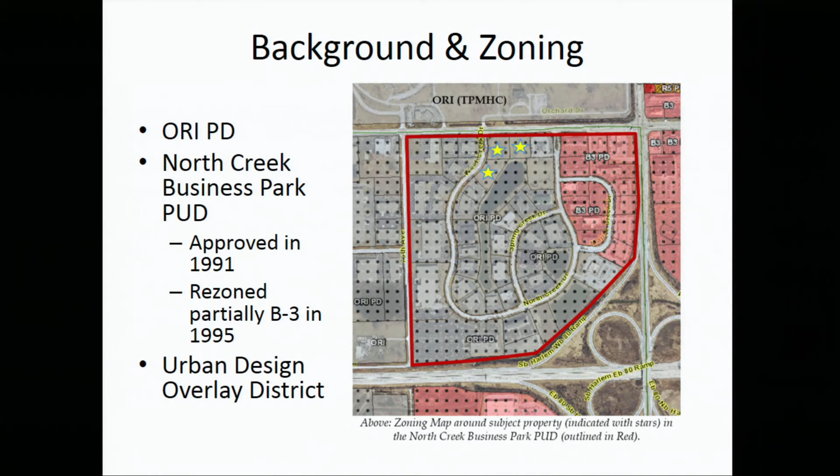It's also located in the Urban Design Overlay District, which promotes walkability, urban design, pushing parking to the back, things like that. In this case, it'll come up because they have some exceptions to that Urban Design Overlay District. We try to meet that intent as much as possible, but to some degree, the surrounding development that's occurred out there, as well as the use itself, which is an auto-oriented use, makes meeting those standards difficult when you have something that's intended for auto use to make it walkable. But we have done some things there to meet the intent.

Also out here on that hard corner, the southwest corner of 183rd and Harlem, is the Speedway that's out there, so the other gas station in the area.

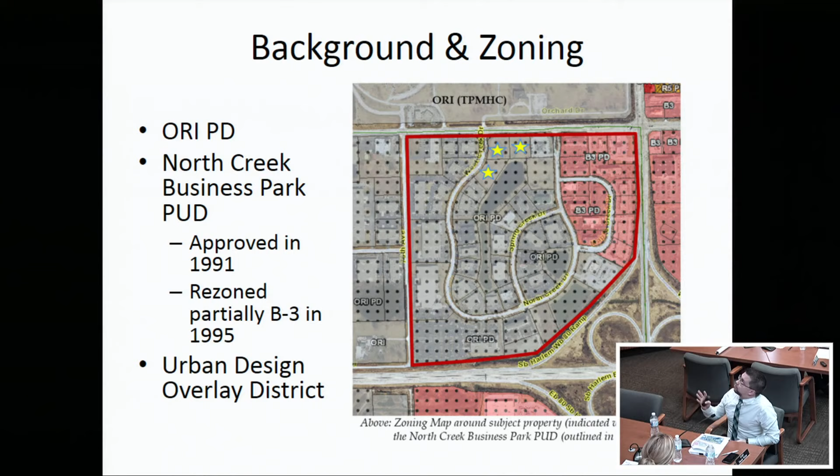This will be 2 parcels and then take a sliver of a 3rd parcel, so those are the 3 shown on your screen with stars out there. And the reason why this site was picked, I think one of their strongest points is it's in Will County, and for competition purposes, if they were gonna be on one of the other corners, it would be difficult to compete with Speedway. So this is kind of that last spot out here that I think the gas station could really work.

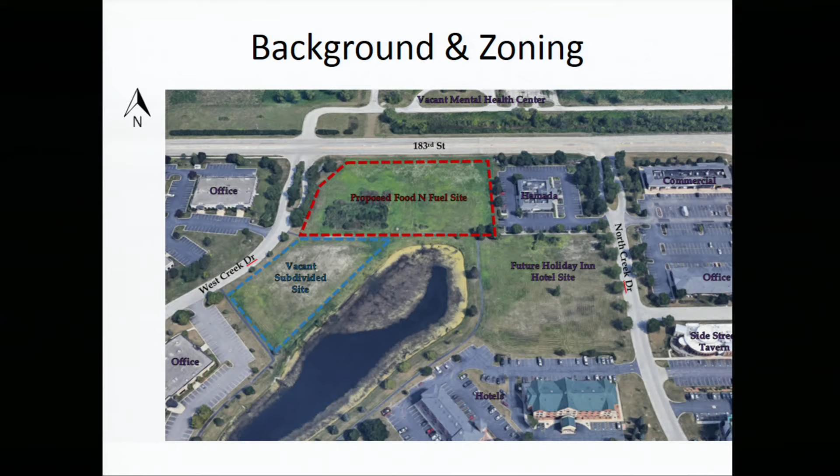Here's the location of the site, with a vacant parcel to the south. To the west is light industrial, office type buildings, flex space buildings. To the east is Hamada, and to the southeast is the Holiday Inn site that came before you a month or two ago and recently got approval from the village board for a full-service Holiday Inn on that parcel. To the west of that is Buffalo Wild Wings and Pops, then Wendy's and the Speedway site.

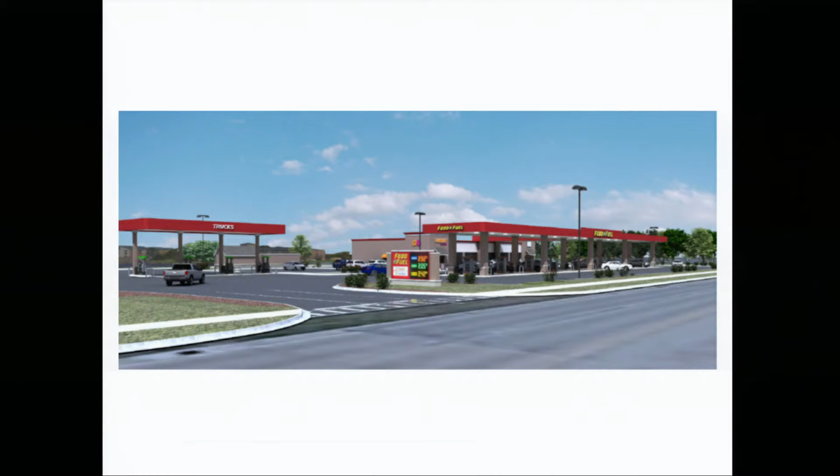So here's what the site will look like in the end: a gas station with truck lanes, as well as a 9,100 square foot convenience store with a drive-through Dunkin' Donuts and a second food vendor, yet to be determined. Also typical retail items and a gaming area are intended.

This is on a 3-acre lot. There's 18 vehicle fueling stations outside, and 3 truck fueling stations - that's a correction from what I said before about 4. Because of the way trucks fuel, they need pumps on both sides, and usually tanks on both sides, so it looks like 4 if it was traditional vehicles, but there'll be 3 truck fueling stations.

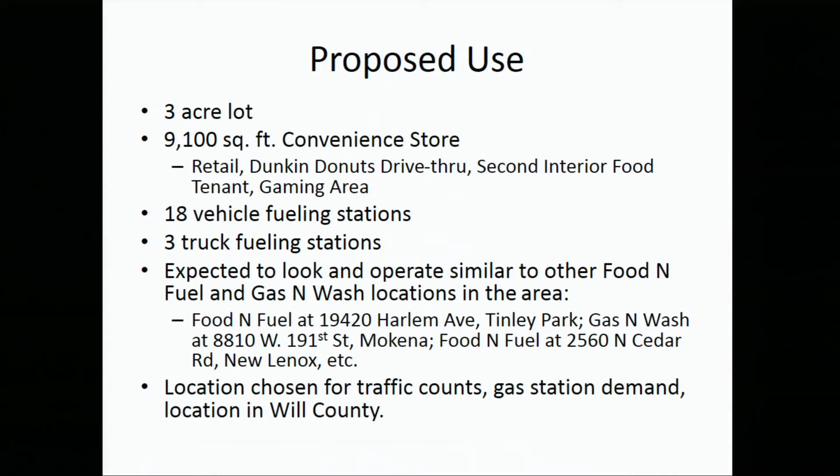This is similar to a Food N Fuel with a car wash that was added afterward on Harlem, which was before you for annexation and was recently annexed. There's also one at 191st in Mokena that's a Gas N Wash very similar to this, and another one on Cedar Road in New Lenox. They've been popping up all over, so this is right in line with what you see at those locations.

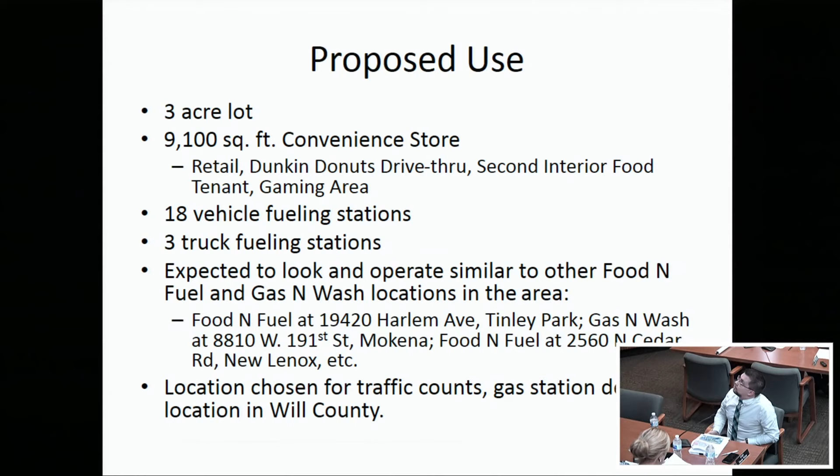Here's the floor plan layout, kind of hard to see, but there's a retail area, service counter, a couple food service areas, and tables will be in there.

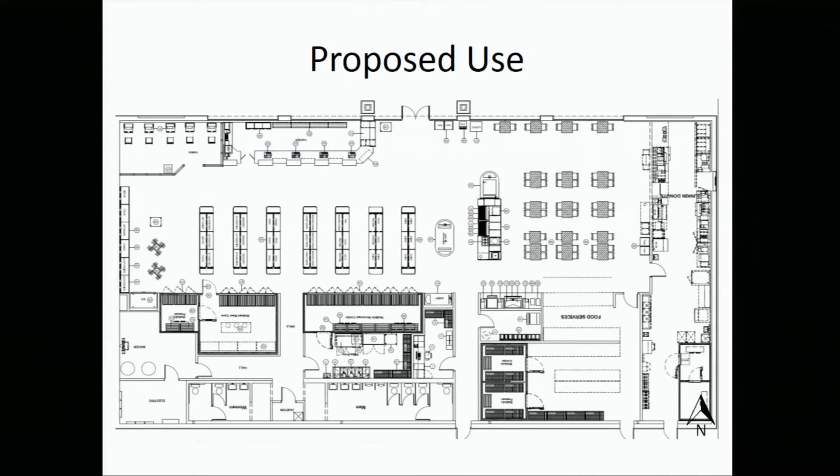For the site plan layout, the fueling stations for trucks are on the east of the site, the main vehicle fueling stations are to the north, and the convenience store is to the south in the center of the site, with the Dunkin' Donuts drive-through wrapping around the back and then to the east.

They have sidewalks, a public sidewalk that will run around the site. Sidewalk connections are kind of limited in this area, but this will tie their sidewalks to the west, and we're trying to get them at least on 183rd. We've talked about it with Holiday Inn too - it's kind of a shame this area doesn't have sidewalks since there are hotels and restaurants, it's a little more touristy, and even the office tenants need to be able to walk through there.

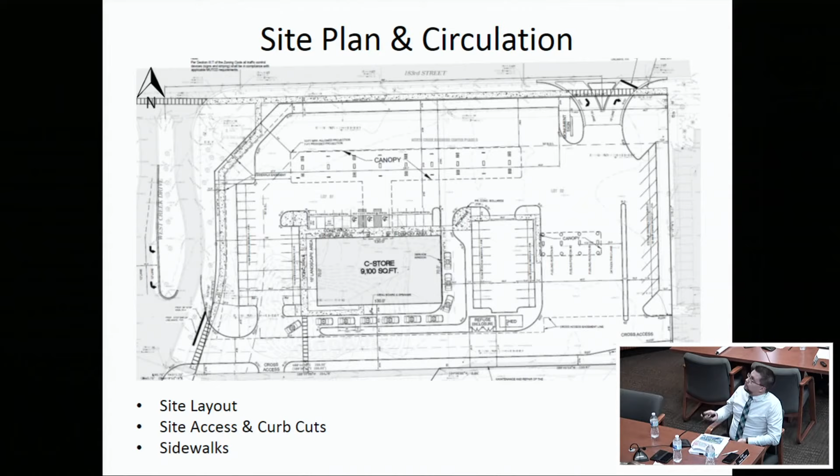Again, there's the overall layout of the site with the parking and the gas station.

Parking-wise, this is a fairly unique use, so it's hard to apply our traditional zoning code to this because it's not something we typically have. You have gas stations, but they usually don't have full food service inside. This runs a little more popular than what you typically see. We tried to break it down based on the uses within this to give some guidance on what parking might be needed. Our zoning code, even by itself, sometimes isn't the best even when it does align - sometimes it overestimates the parking needed, sometimes it underestimates.

So we rely a bit more on them to give us a parking study, which they did, and they updated it - it was in your packet this time - from KLOA, their traffic consultant. They have other sites like this, which I think is a better representation of what kind of parking we're going to see here, since we have known sites out there that function like this. We wanted hard data on those, and they added that into the report as well.

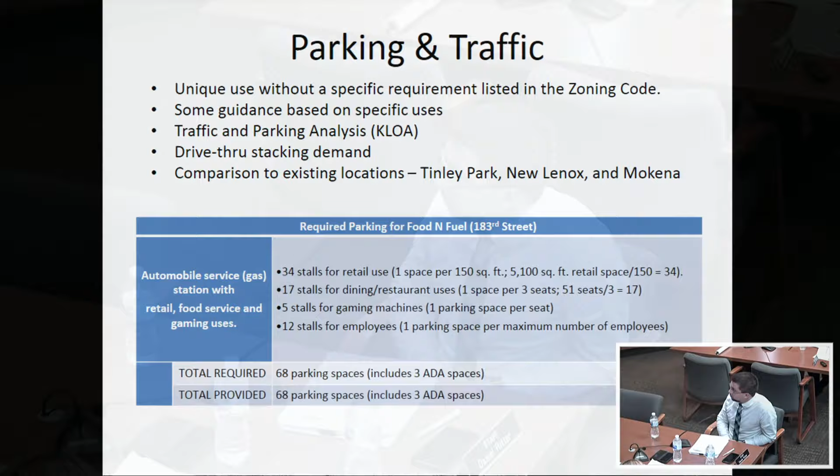When we break out those counts, you have people that do multiple things — they'll go get gas, then go get food, using both uses at once. So I think you get some spillover there. On the drive-through side, we had them add a little more counts in terms of the other sites they had. There's a Dunkin' Donuts at almost every gas and wash, Food N Fuel location, so we had them bring some hard data into that.

This site has 10 stacking lanes. Most codes require 5, 6, or 7, but Dunkin' Donuts is getting a little more popular and expanding their menu, so we want to make sure we have sufficient stacking availability. The other sites they looked at had a maximum usual amount of 8, so here they'll have 10, and we think that'll be sufficient for the stacking. We're still going to look into, maybe with the permit, exactly where the menu board is going to be, because that could change things — one more stacking spot for people waiting for coffee, or one more ordering spot — but we'll look at that when the permit comes in.

On the landscaping side, there were a couple waivers we talked about at the workshop. The biggest one is the north buffer yard, which is fairly unique because typically they'd have to put in parkway trees as well as trees in their buffer yard, and it doesn't discount trees in the parkway. So there'd be twice as many trees out here, and if they met that, it would block almost all visibility to the gas station. We want a good landscape site, but our landscape code can be a little over-ambitious depending on the situation and location. I think that's what happened here, but they did meet it as close as they could.

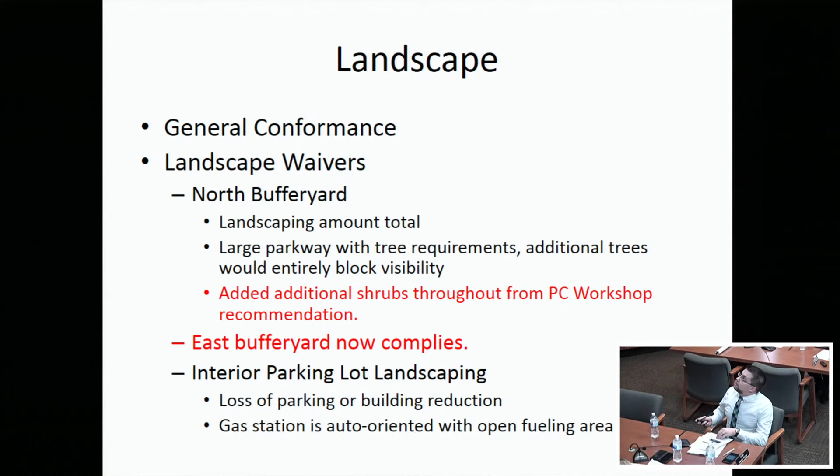The last waiver they had for landscaping was the interior parking lot landscaping, which no one really brought up concerns about at the workshop, but it's hard to meet on a gas station site where the entire fueling area is counted as a parking lot, so it's hard to install landscaping into a fueling area. If you discount that, it comes a lot closer to meeting the landscape code. So there's the plan that they had.

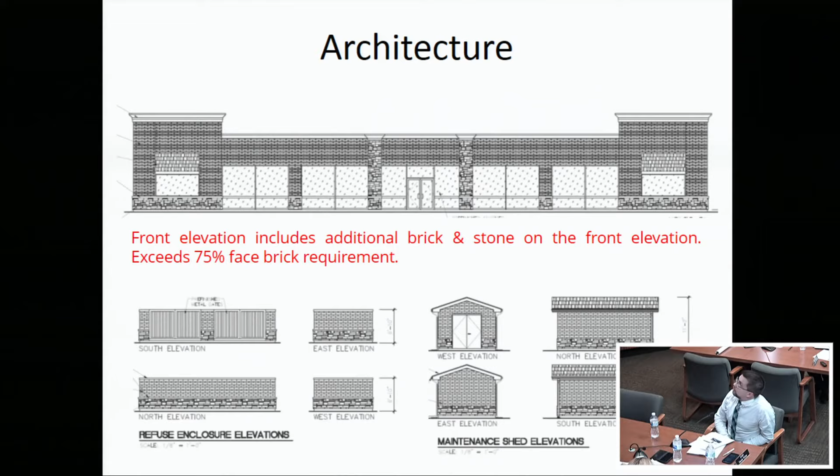Architecturally, this is one of the biggest changes they've made from the workshop meeting. We caught, or Paula caught, during the meeting that they were a little short on the brick or masonry percentage. The front had some EIFS area but no real signage there, so they converted it to brick, and brought up stone on the pillars in front to break up the brick. Those were two suggestions we gave them, along with using a lighter brick on part of it, and they've incorporated both into the plan.

So now it exceeds that 75% face brick percentage. They also have matching enclosures and a maintenance shed on site that meet that same brick and stone base, which I think looks pretty good for a gas station building.

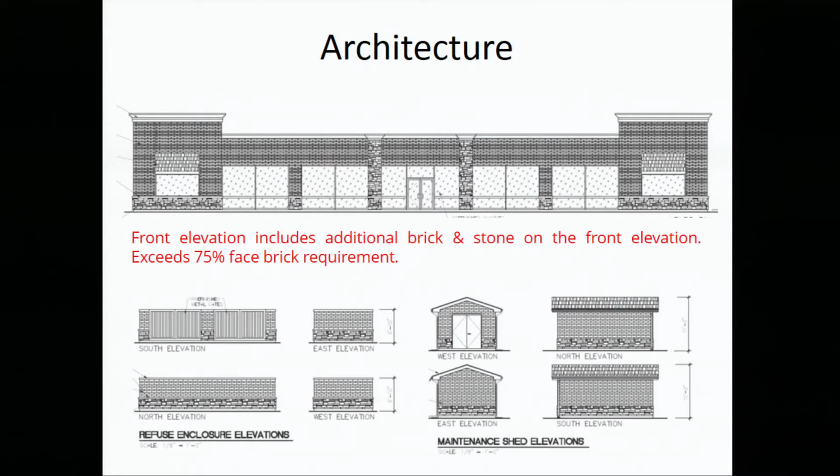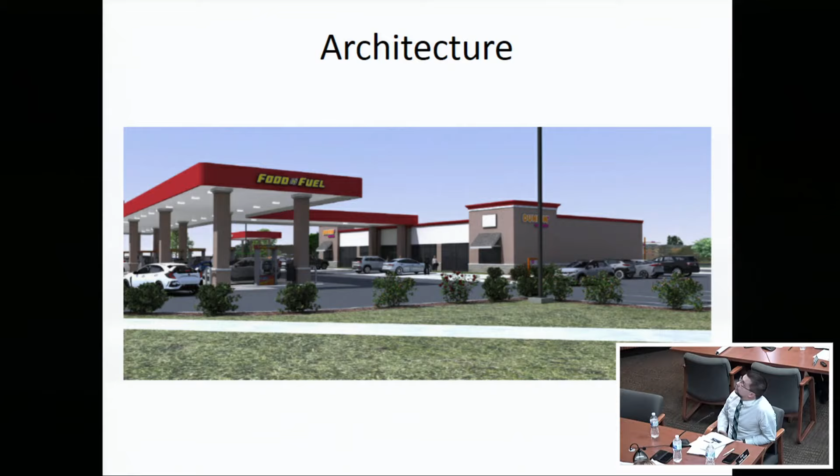We also have updated renderings for the site. The only thing not updated on these is the brick, so you can see the lighter white area in there—that's now brick, and they're going to do a lighter toned brick than the rest of the building. Everything else has been updated on these renderings.

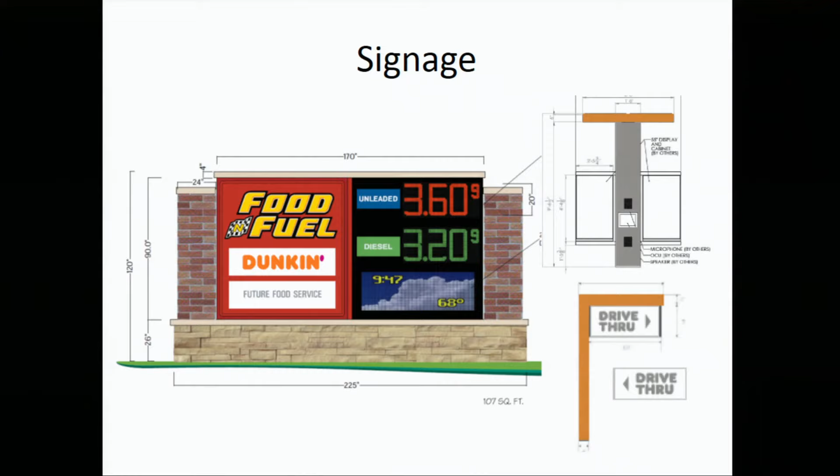Signage-wise, they meet our sign code for the canopy signage and wall signage. They have some. The ground sign has an LED message center display, and it's the right size in terms of percentage of the overall sign. They also have signage for their Food N Fuel and two other tenants, plus some directional signage placed at decision points on the site plan that make sense. We like limiting directional signs to areas where they work best, and I think they've done that.

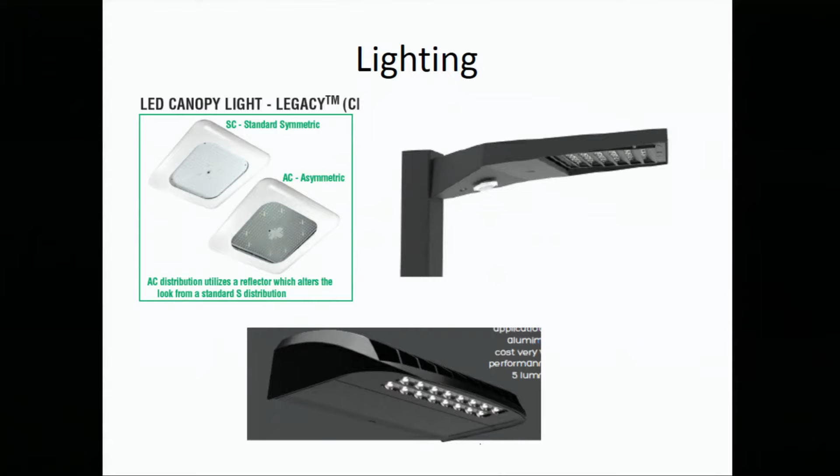On the lighting side, we have a new lighting ordinance in effect that you guys approved about three months ago. It requires everything to be downcast and full cutoff so there's no glare out in the roadway. They've accomplished that here with the lights they've chosen, and they've also gotten the foot candles right so there's not a lot of light spillage off the site. There's no residential around this, but we still don't want light or glare spilling into the street or onto other sites.

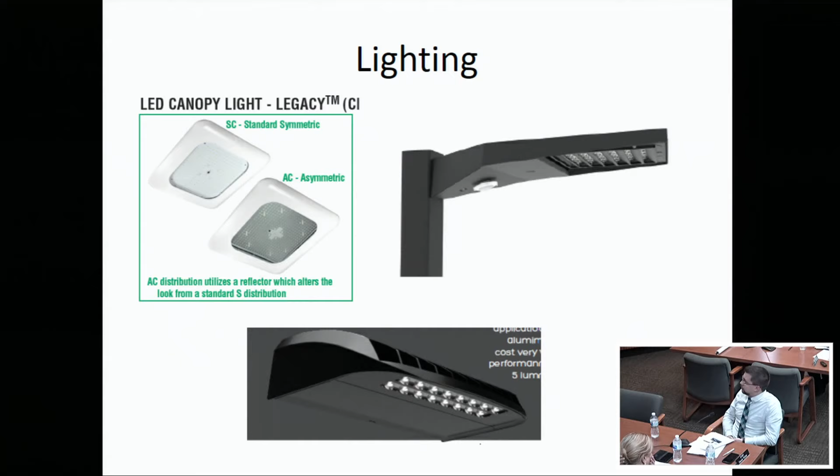For their approvals, they have a site plan, but there's also a need to add a gas station, or as our code calls it, an automobile service station—a bit of a throwback in the definition—as a permitted use in this PUD. Right now it's not allowed in the list of extra uses typical of B3, and it's not allowed in the underlying ORI. So we thought about possibly rezoning it as B3 underlying zoning, since it's directly next to B3 zoning, or with Hamada's which is technically ORI too and is a restaurant. It made sense to possibly continue that B3 zoning down, but we thought the simplest route was just to add this as a permitted use on this site only.

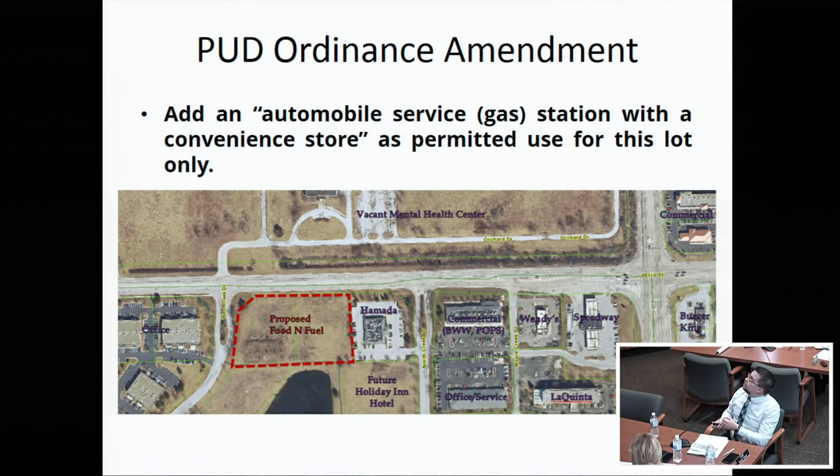There are a couple other vacant sites left in there; they wouldn't be allowed to do a gas station. This also benefits it because a special use usually doesn't transfer to new owners, so someone might need to come back if this was sold to a different gas station. Making it a permitted use means it can be transferred in the future since it's being built out as a gas station. So that request is amending the original PUD ordinance to allow this.

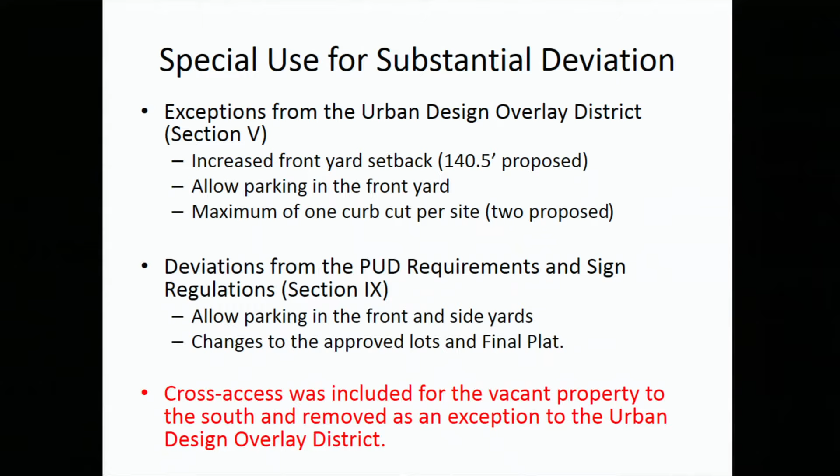Separate from that, there's a special use they're asking for. The majority of that involves exceptions from the urban overlay district, as well as a couple from the PUD regulations. Parking in the front yard typically isn't permitted in both the urban overlay and the PUD, because they wanted more of an urban feel. But with a gas station, it's hard to make that happen unless you push the whole canopy to the back, and then they don't quite get the access and feel they want to draw people into the gas station.

Cross-access, so they eliminated one of the exceptions, because cross-access was included to the vacant property that's to the south of this. So there's one more vacant property that connects to this, and they included cross-access. Whether that makes sense or not, we can determine when that property comes in. If it's an office building, they may not want that traffic.

And then there's cross-access to the east as well, to the Hamada site, that's already built into the Hamada site, and then it'll be here. If you go back to the site plan, trucks won't go out to the east on this. They won't go to the east into the Hamada site. There'll be no truck access on both Hamada's property and on this site.

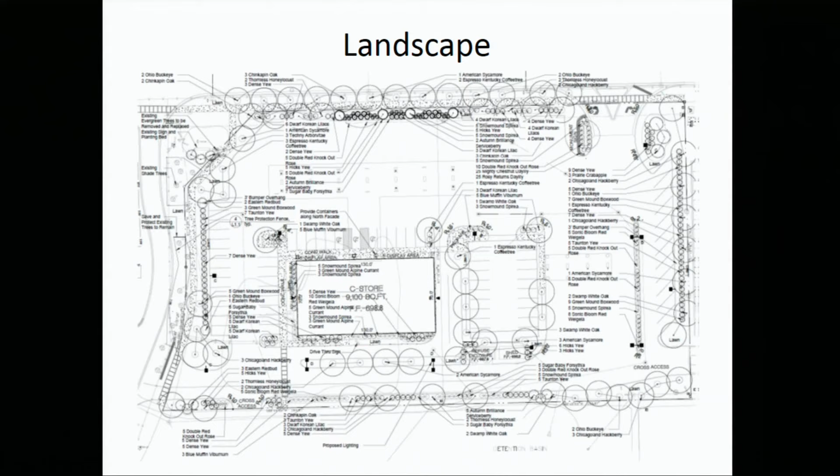So trucks will mainly go to West Creek Drive, but if you're just a passenger vehicle, you'd be able to go on North Creek Drive where Hamada's at, and then drive through. There's a drive aisle through there that would connect to this property. The cross-access always helps avoid the number of curb cuts that we have on our streets.

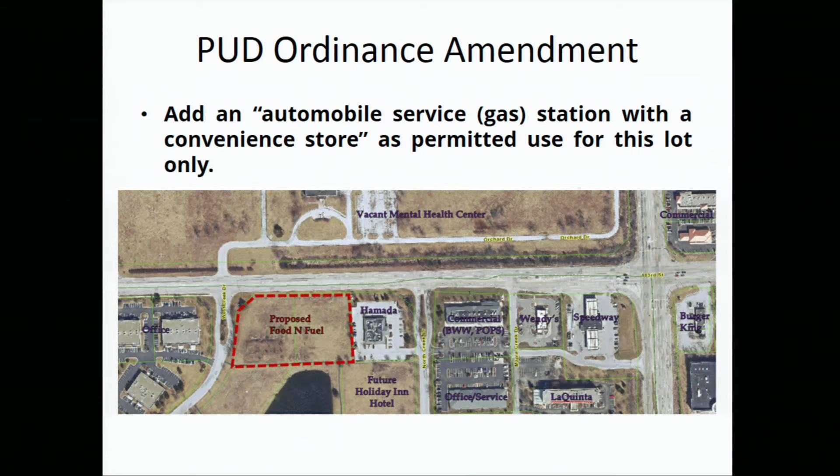Then lastly, I think I forgot the plat on here again, like I did last time, but there's the final plat of subdivision on your property. That is consolidating the two lots that are there along 183rd Street, and then it is also taking a very small sliver, just over 100 square feet, from the vacant property to the south. That's gonna make this 3 acres. That's a requirement to get gaming at the state, and they obviously wanna have that ability to get it. So they're taking a small sliver from that and consolidating the other two parcels.

On top of that, the plat carries over all the existing utility easements. It adds the cross-access easements to the west and the south. And then it also adds a sidewalk easement. Some of the public sidewalk will go onto their private property, so there's a sidewalk easement for that as well.

Besides that, I think they've taken care of the open items that we talked about. The last thing, and the thing that I think was discussed most at the workshop meeting, was the possibility of a light somewhere out here, either on West Creek or North Creek Drive. West Creek still is, talking to our engineer, that's where a light would be, on West Creek Drive.

We've talked with the county, and we've talked with the state about how this would connect with the Harlem light before. It really hasn't gone anywhere because there hasn't been the traffic counts or the stacking that is required on one of those streets to get it. Obviously this is gonna be somewhat of a draw.

We also have 2 hotels that were built since the last time we talked to them, so the engineer's gonna talk to Cook County again and try and get the ball rolling into seeing if they can look into it. A lot of times that takes a long time though, so he's also gonna bring this up in terms of, can we pay and do the study and see if it's there, or maybe do some kind of initial counts to see if it meets the standards that we need.

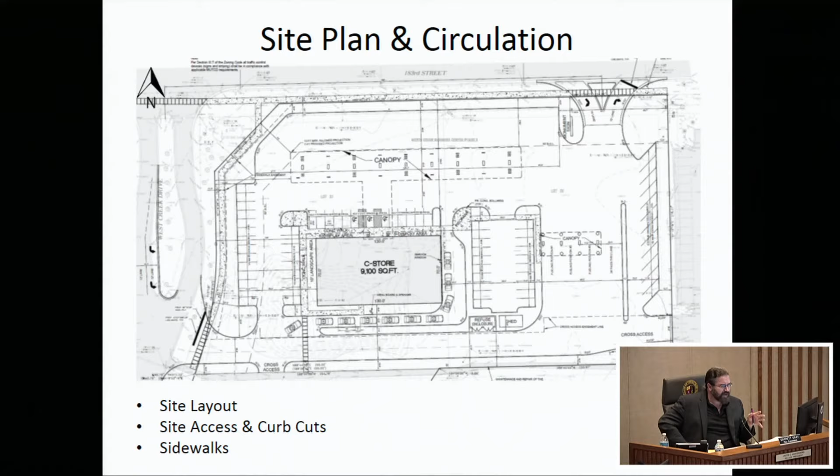Yeah, we did. Just so I understand you, you're talking at the right in, right out - yes, correct - and the proximity of the pumps and them turning around. Yeah.

This is a lot like your one on Cedar, 6 and Cedar, where you got the right in, right out, right where the pumps are.

Okay. And one thing we have going for us with the right in, right out - the majority of the traffic's gonna be coming in on the west drive. Typically most people come in that first drive instead of the right in, right out, so that will help us. Now that it's not a full access drive, it will help us too, because you won't have the queuing that you may have had if someone was going left. But I think it will function fine.

Okay, people know in a gas station there's a number of movements. You have the trucks coming out from the south there, but we're not expecting a whole lot of trucks. And the main thing is there's a lot of good sight lines - you can see as you're pulling around, and you'll be able to see everyone. And when you come around that corner from 183rd...

Those are pretty tight turns, so you have to make those about 5-10 miles an hour. So as you're coming around there, you'll be able to see if someone's coming around and pulling out. Okay, yeah. Great question, though.

And the reason being is, it is a madhouse at that speedway, and I figure this will get bang-up business just like them. It would probably take away some of the business, which is fine, because I think there's gonna be a lot more businesses that need gasoline, and you don't want to wait at the pump.

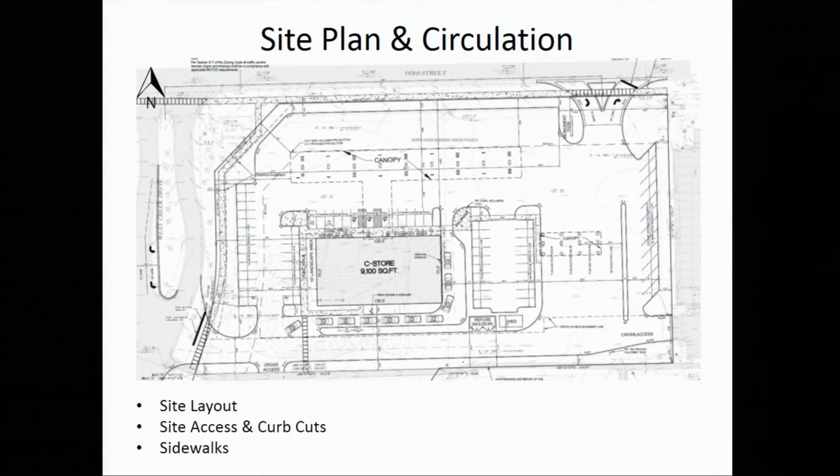I will say about the crosswalk, that is common that you find along any driveway, any road. It's usually right along the property line or the right-of-way line. Good drivers, most drivers, are aware that pedestrians are crossing the road. The one thing with the right in, right out, they will have a refuge area in between, so as they cross, they can stop and make sure. And once again, you can only make that turn so fast, and the sight lines are great too, so there's not a whole lot of trees in the way or anything like that.

So it's common, you see it all over the place. Once again, it's a concern, but I think most people understand it, and it should function fine. It's one reason why we like the raised medians there too, because sometimes they try and just stripe that out, and that can have people take the turns quicker. But there's not much else you can do if you want a sidewalk on 183rd or LaGrange, or even Harlem, if you want a sidewalk and you want to have commercial, at some point there's got to be a crosswalk.

But I think the raised median and then the islands in general here kind of help traffic flow, where Speedway is a terrible example, it's just open, undefined pavement throughout the site. So when you put in curbs and landscaping, it really helps slow people down, where at Speedway you can drive through the parking stalls, if they're parking stalls, or whatever else is out there. There's not really any kind of islands when you enter, and no curb delineation throughout it. So I think this will function much better than Speedway, just because of the flow they have set up here, where Speedway's just open.

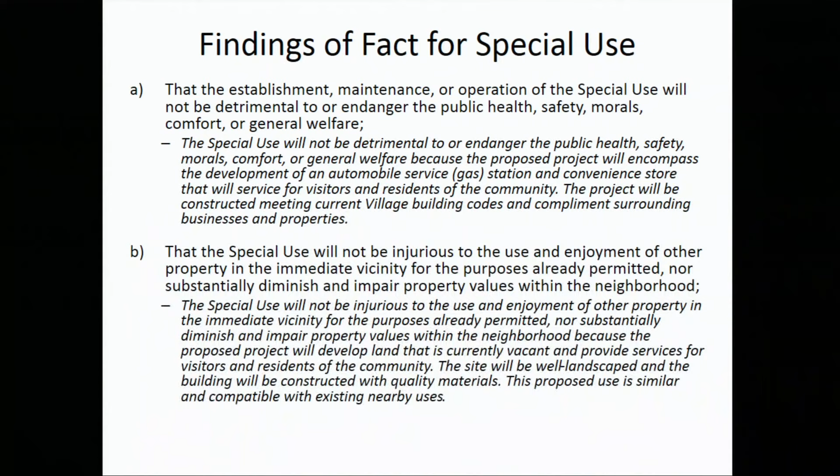The ingress and egress, we talked quite a bit about that. They'll have 2 curb cuts that'll function well to get vehicles and trucks in and out of the site. There's also public and private walkways throughout the site that are interconnected. That's right.

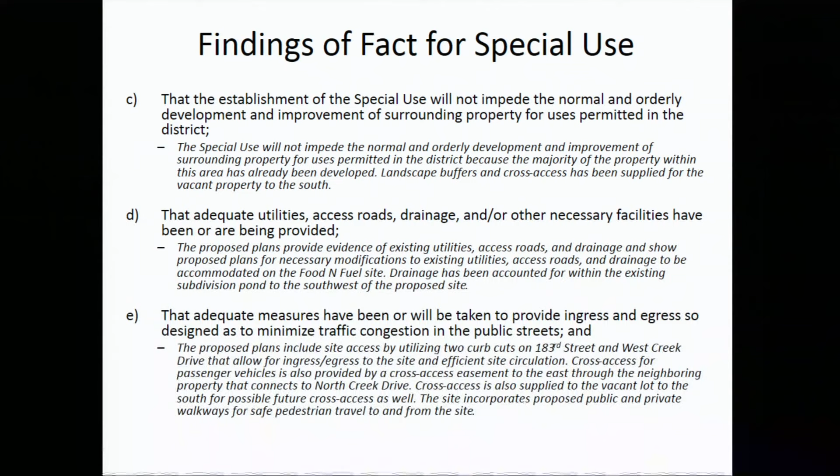Again, it conforms with most of the applicable regulations of the PUD, with just a few exceptions that meet what's set out there, with the exception of the maximum of 1 curb cut. And again, in this situation, they're combining 2 lots.

And then in terms of economic development, I think this will definitely help out. There's fuel, retail, and food services for visitors and residents, provides additional jobs, property tax and sales tax revenue that's not being generated right now. So I think that's a big impact there as well. That's it. Okay, thank you, Dan.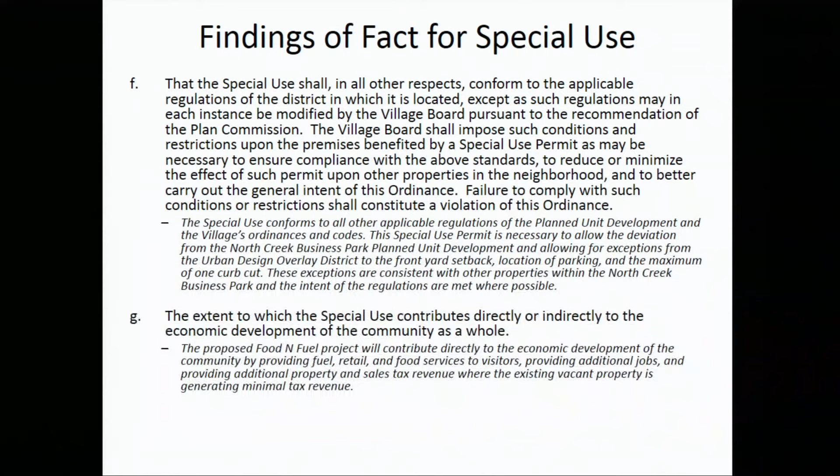At this time, I'd like to request motions for this item, we have 4 motions, so beginning with motion 1, I'd like to request a motion for approval from the Plan Commissioners. I'll make a motion to grant the petitioner Lenny's Food and Fuel, 183rd Street LLC, site plan approval to construct an automobile service gas station and a 9,100 square foot convenience store building at 7451 183rd Street in the OR-IPD Office and Restricted Industrial North Creek Business Park PUD zoning district, in accordance with the plans submitted and listed herein and subject to the following conditions.

1, any changes in drive-through or parking demand from what was presented would require new traffic or drive-through analysis and prior approval to ensure the on-site drive-through stacking and parking is sufficient. 2, site plan approval is subject to final engineering review and approval. 3, site plan approval is subject to approval of the PUD ordinance amendment, special use for substantial deviation to the PUD, and final plat approval. Motion made by Commissioner Fielder.

Can I get a second? Motion seconded by Commissioner Gaskell. Can I have a roll call?

Stanton? Yes. Fielder? Yes. Gaskell? Yes. Aitchison? Yes. Vic? Yes. Jim Gray? Yes.

Motion carries. At this time, I'd like to request another motion for approval from the plan commissioners. I'd like to make a motion to recommend that the village board amend section 4-A of ordinance 91-0-083, Special Use for North Creek Business Park PUD, at the request of Lenny's Food and Fuel at 183rd Street LLC.

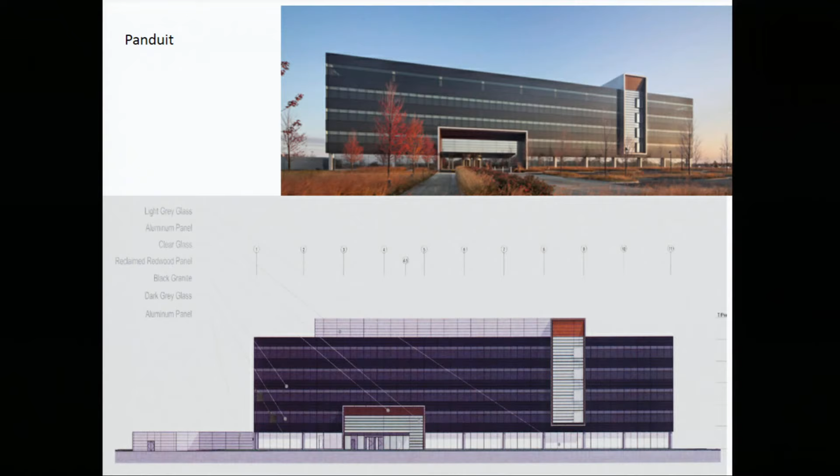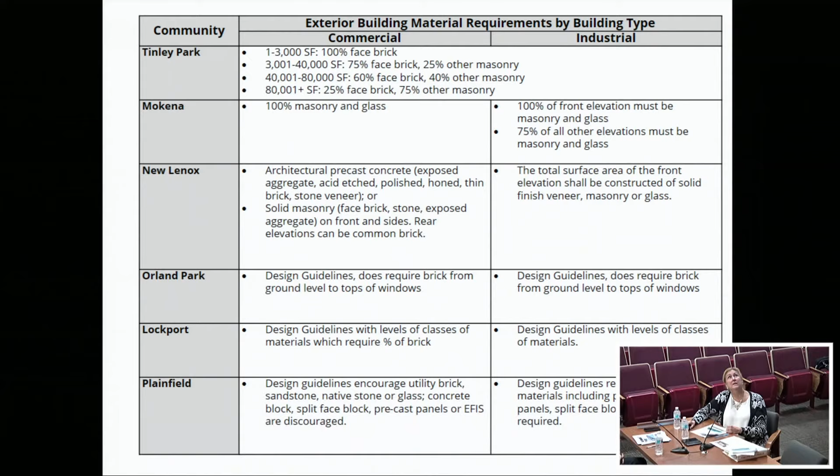When we looked at other communities, we found similar guidelines to what we have for our commercial. The only additional thing a lot of these communities do is have design guidelines, which helps guide development beyond just a strict masonry requirement. We begin to look at various architectural terms regarding balance, scale, and articulation, so we wanted to do that as well.

That was helpful as we moved from the building code to the zoning code, enhancing what we're doing by developing design guidelines. What was interesting when we started polling other communities is their code may also have been fairly restrictive like ours, but that's not what they're enforcing.

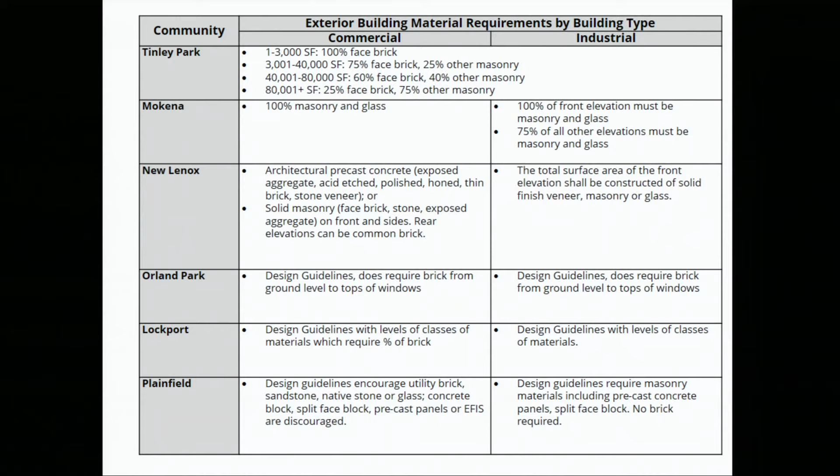They're providing waiver upon waiver - fairly large industrial development out in New Lenox with Cherry Creek, and none of those have brick on it. So I don't think we're doing anything out of line with what we're seeing in the region, and certainly we want to be competitive, especially on the Cook County side.

You've seen these on the I-80 corridor, I-55 corridor, Lemont and Plainfield - again, attractive buildings. That's where the architectural guidelines will help us, so that we don't just have large masses of tilt-up panels, and we do have some architectural detailing to them.

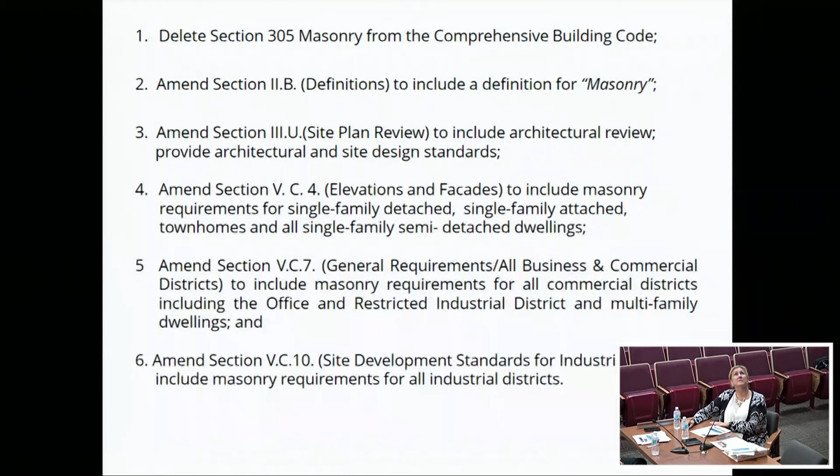So in all, what we're proposing with you tonight are 6 different amendments. I'll go through them quickly to explain how we're getting to where we are.

The first was we never had a definition for masonry, and that was difficult for staff to enforce, because what does masonry include? So we provided a good description that we felt was comprehensive and met the needs of the uses we're going to see.

So you still have face brick, but you can also use decorative stone. Our tilt-up and pre-cast masonry walls also are going to be considered masonry, whether those have brick inlays or not. And when we start looking at precast concrete walls, we'll allow those and consider them masonry as long as they meet the architectural guidelines we'll set, which we'll talk about in a little bit.

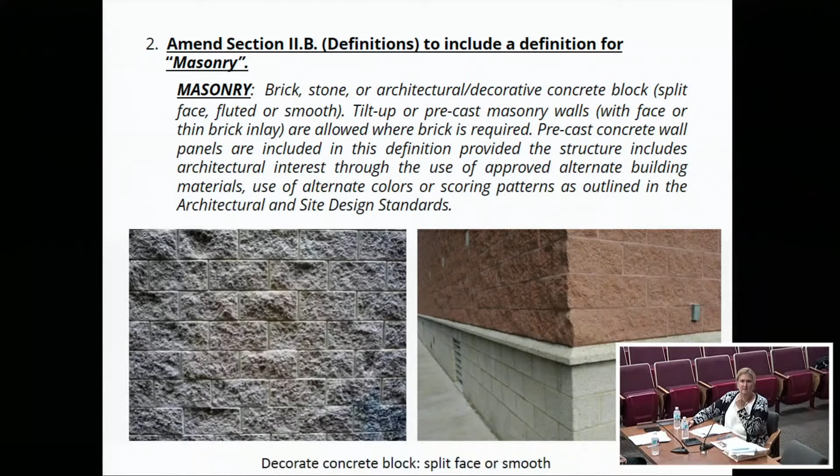So that gives you an idea, for those not used to some of these architectural terms - that's split face block you see on the left, and on the right on the bottom, it's a smooth face block. It's not the typical CMUs you might see in home foundations, but they have a bit more architectural detail to them. Fluted concrete block is another that can be used for banding or soldier coursing around the window.

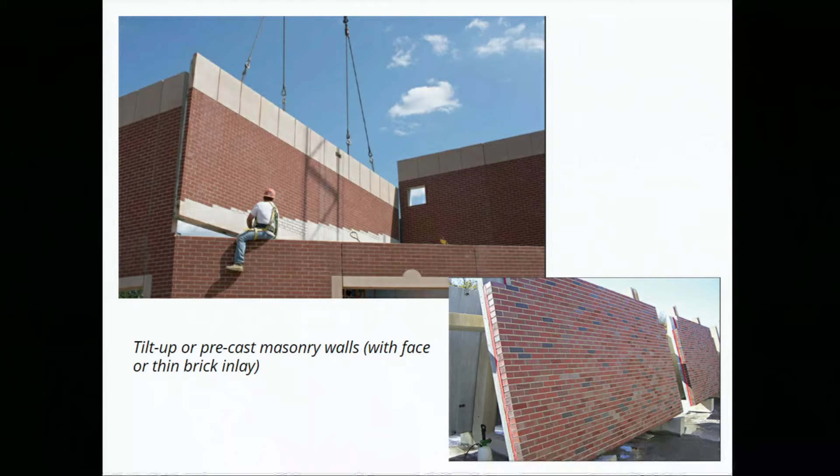This is some of the precast - it's not real recent, it's been around for a while, but it provides some economy to these large buildings. You still get the masonry look, but obviously there's much more cost effectiveness in these large wall spans. The only thing I've had some concerns about, and actually the industry is getting better, is where those joint lines are, and the architectural guidelines address that, which we'll talk about a little bit later.

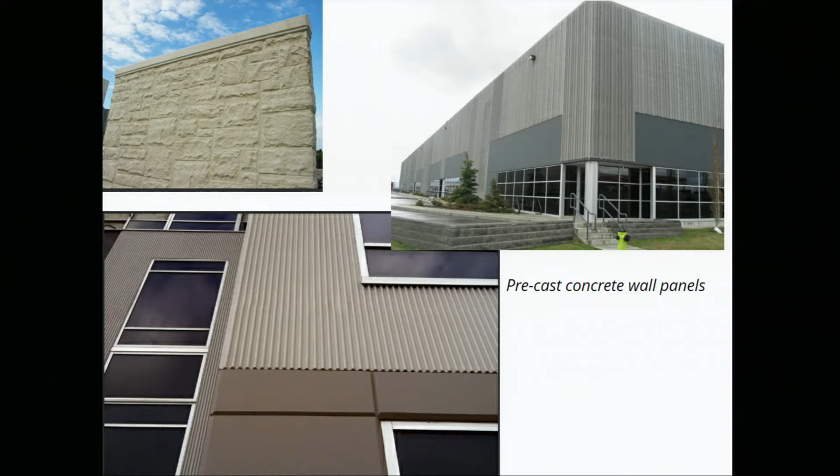So all these are precast concrete walls. These show some architectural detailing that I think end up with an attractive wall face.

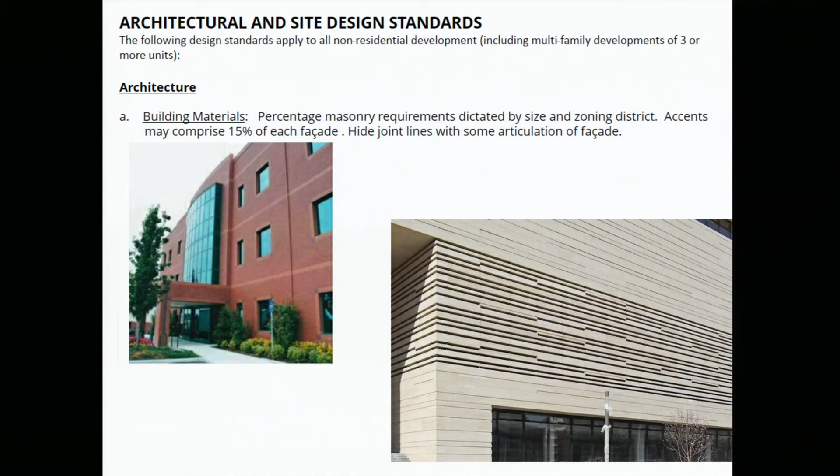The second amendment we're discussing—not only did we just talk about the masonry makers guidelines, but this is under the architectural and site design standards that we're going to include. Right now we are under our site plan review powers, and just like this evening, we do a site plan review. What we're recommending is that we add architectural review to that as well.

Some communities take this pretty far and have an architectural design review committee. I'm not espousing that—I think that gets complicated and protracts our review process. I have confidence in existing and future staff, and with the guidelines we can do a very good job of doing an architectural site plan review. We do bring them to planning commission when there's any kind of zoning aspect, so you get involved. You write these guidelines broad enough to give staff and the commission flexibility, but particular enough that we're guiding development in a way that results in quality.

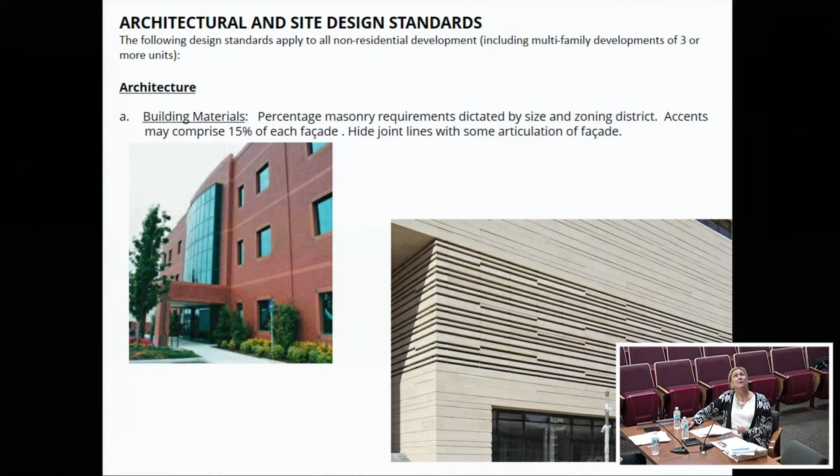So just real quickly, this shows what some of these standards include. This describes some of the accent materials that we're allowing.

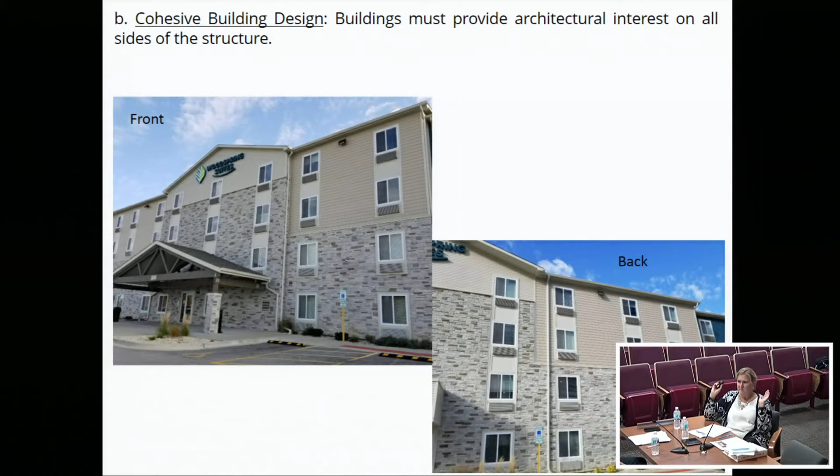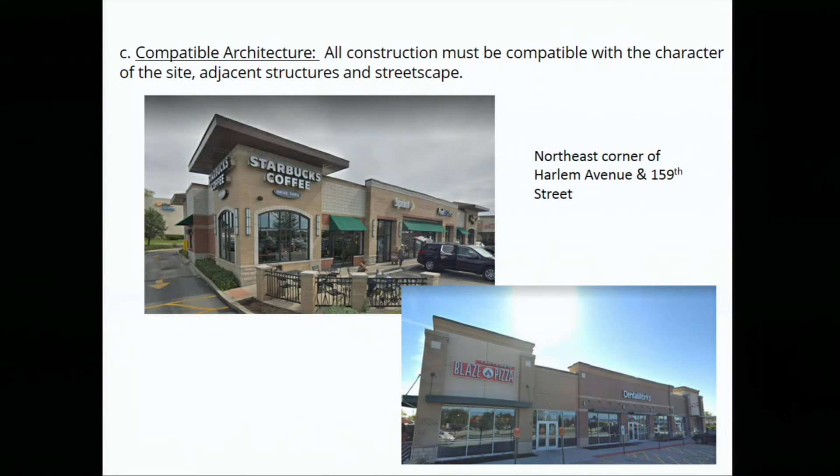We're asking for a cohesive building design, so we're not just seeing a front facade that looks nice on the street face, but that design carried around all four sides of the building. Compatible architecture—again, especially for commercial, if it's a strip center, you want the outlots to be compatible with the main center, like you might see on the Brookside Marketplace.

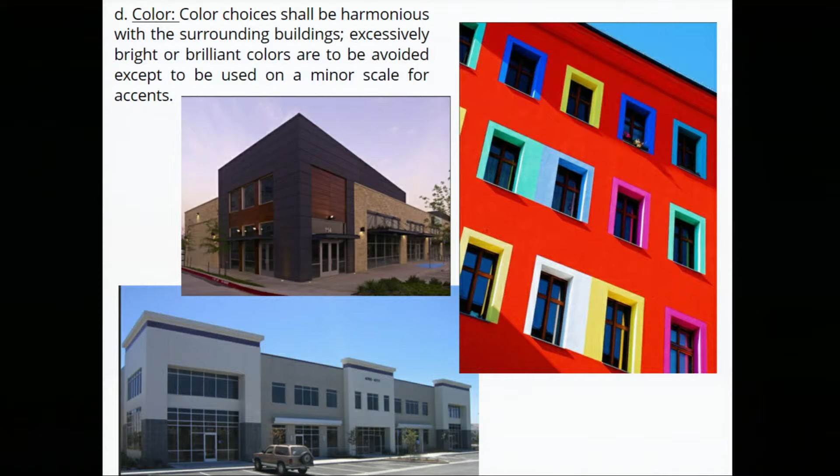This is a fun one—color. I love legislating aesthetics. Beauty's in the eye of the beholder. Wasn't it Kurt who really liked the bright color from last time? The top right one—so it's going to be hard to regulate. If we were trying to support a bright colored building for Kurt, we might do that in an isolated situation instead of a strip center.

But if it's a children's museum—we'll have a lot of fun.

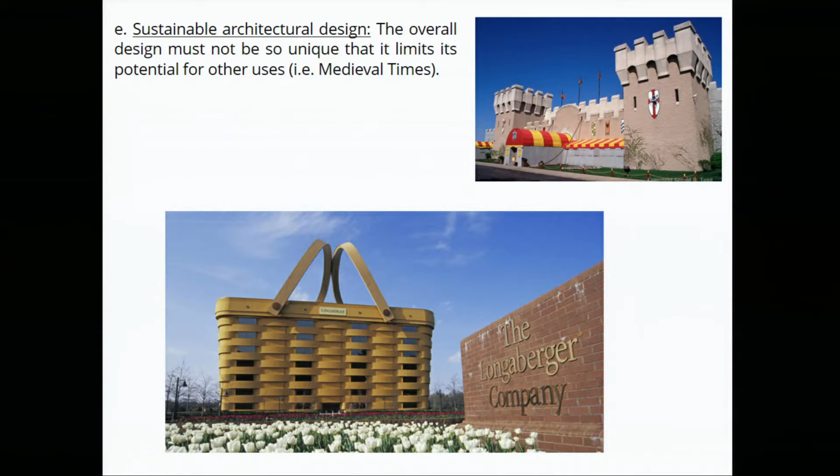This was a fun one too—sustainable architecture, not necessarily in terms of environment, but how these buildings will hold up. This is becoming really important when you think of all the big box commercial and brick-and-mortar issues we're having, so we need to think ahead about how these buildings will look later. I'm glad we don't have the Longaberger basket building—ironically, they did something the other day about coming back and making them again. It's an interesting building.

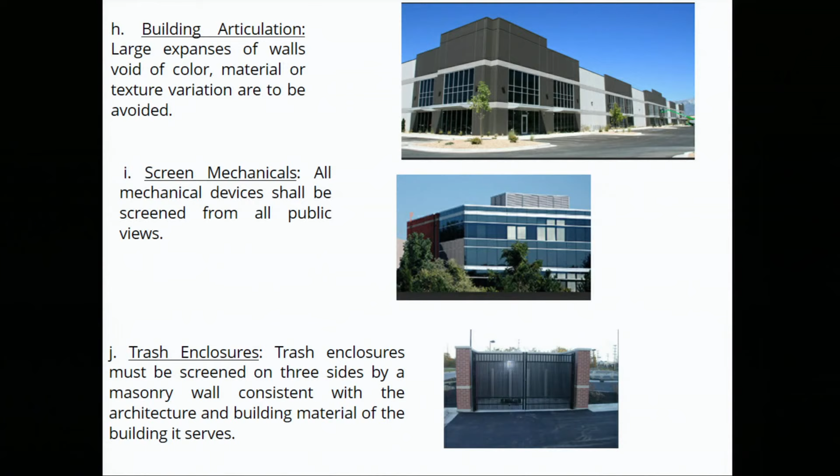Define entry—looking at roof elements, we have requirements based on structure size. We want to see a roof element, but when you're getting up to a large million-square-foot building, you're not going to put a roof on top of that. Looking at articulation, that's providing shadow lines and some moving in and out of the facades, making sure mechanicals are screened and trash enclosures are screened.

Site design—making sure, as Dan talked about this evening, we have an overlay district, but we don't want parking to dominate the site. We like landscaping around the building. We feel the building should be the best advertising for the business, so let's show off our architecture rather than a sea of asphalt.

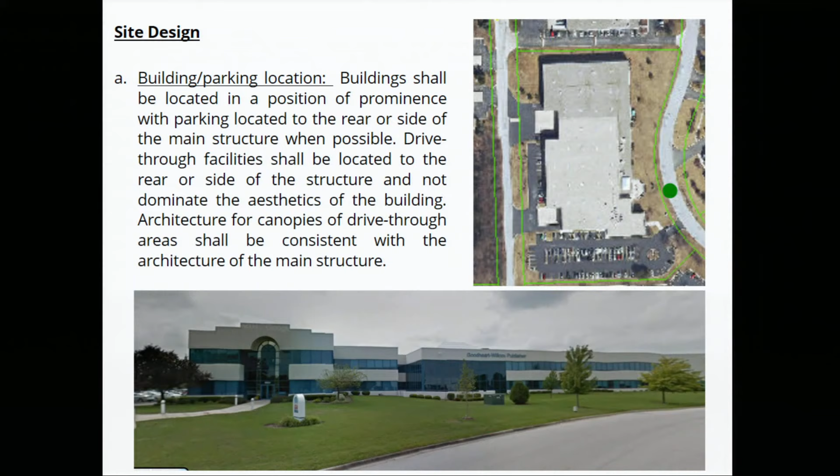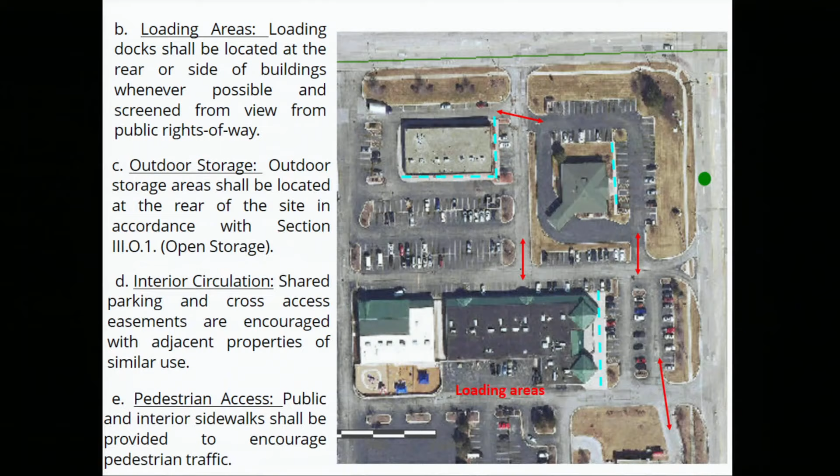Loading areas and outdoor storage areas—looking to keep those out of the face of the streetscape, making sure we're providing cross-access, continuing Dan's great job of site planning so we've got cross-access between adjacent buildings, and making sure we prioritize pedestrian access where we can.

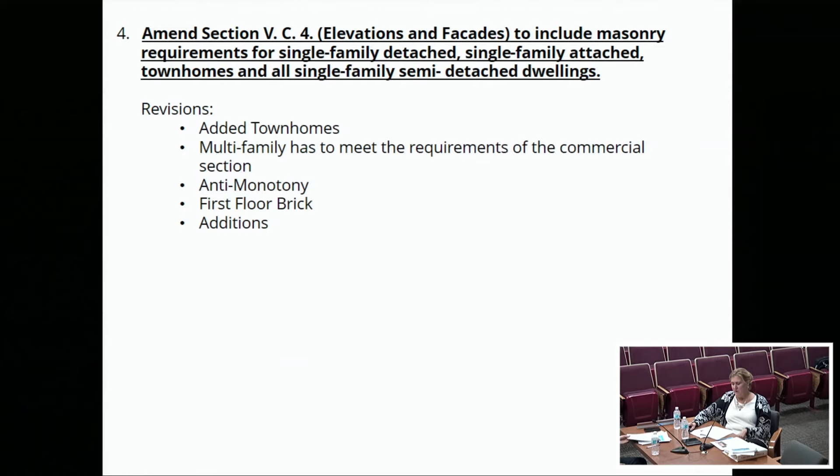So the fourth section we're talking about amending relates to residential developments—not changing anything from what we have now, except noting that multifamily structures of three units or more will be reviewed under the commercial requirements. This defines things a little better than our current building code, including first floor brick requirements and what happens when there's an addition on an existing building. But the standards remain pretty much as they are in our building code right now.

Now this is starting to look at our business and commercial districts. The way our code is written now talks about all non-residential developments. It didn't really distinguish between commercial and industrial, and I think it's important that we do that. Most of our commercial structures are a little bit smaller, and the standards we've had up to this point have resulted in quality architecture. It's really the industrial uses that I'm concerned about, so we've distinguished between those, and when we roll this into the zoning code, we'll keep the business and commercial districts separate from the industrial. We're also lumping in our office, our ORI district, because most of those are corporate office and small office buildings or light industrial buildings.

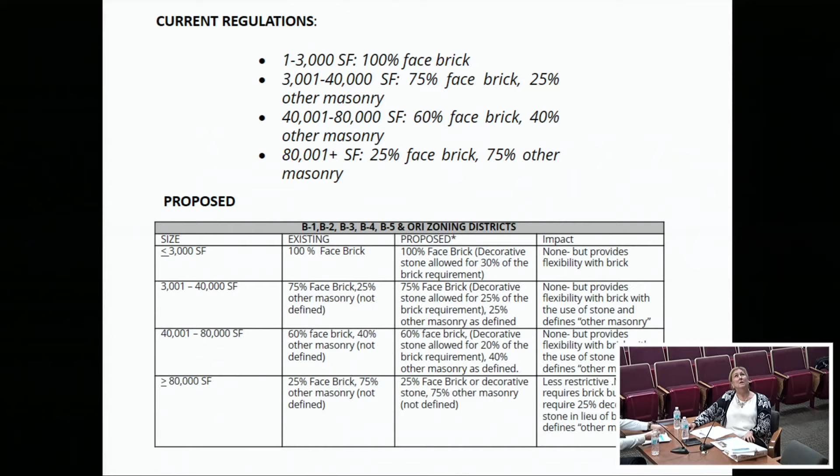If you look at the top there, that's the way the code is written now. Up to 3,000 square feet, everything's 100% brick. When you get up to 40,000, you're only required to have 75% brick. Up to 80,000, 60%, and then once you go over 80,000 in a commercial building, you're only required to have 25% face brick. That's the way it is now.

The only thing we really added is we found that the standard in the industry right now is using decorative stone. So we wanted to provide a little flexibility—instead of requiring all face brick, we're allowing them to consider 30%, for example, could be decorative stone. If you think about Gas City or Gas and Wash's development, they had brick and some decorative stone at the base. That's what that does. Instead of making it all brick, which is pretty monotonous, it allows some flexibility in design standards for the developer.

So in this table, you'll see I'm comparing what's existing, what's proposed, and what the impact is. It's not really until you get up to over 80,000 that we're getting a little less restrictive, where I'm not even requiring brick, but it does require masonry of some sort—so it's going to be 25% brick or 25% decorative stone.

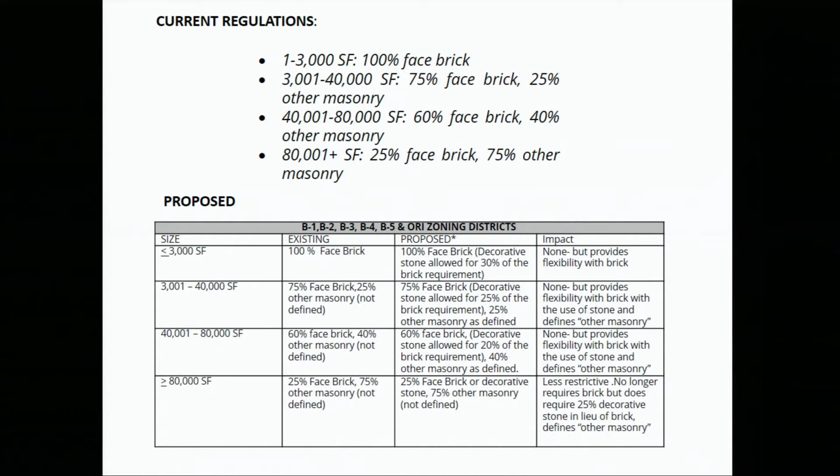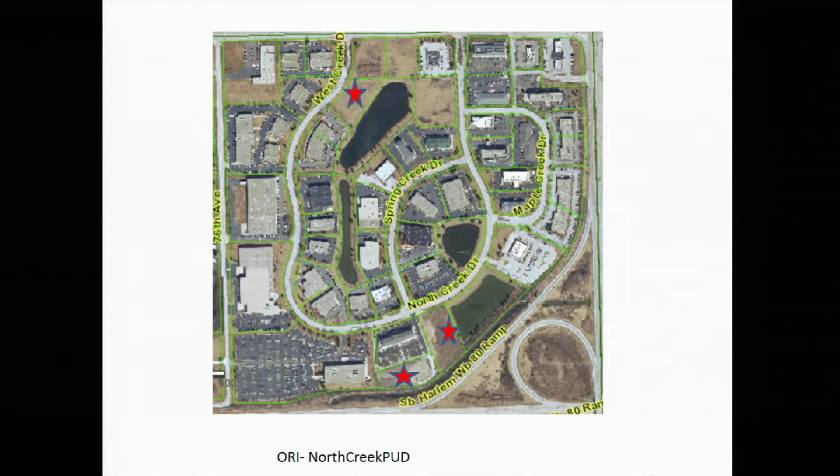The point of bringing in these slides was just to let you know where the opportunities are. We don't have a lot of undeveloped property, but there are certain areas. I think it's going to be important that we have these new standards and new architectural design guidelines to help guide that development. This is right out in the area where Dan was just working. You'll see that top star is right below where the new Gas and Wash will be, and then on the south, that's Wood Springs Hotel.

Out on 45, I think there's a lot of opportunities out there—we've seen some interest in hotels out there. So again, having this down in our zoning ordinance, giving us some design guidelines, I think really is going to smooth the way for quick review. Developers all just want to know where they stand when they come in, so when we have this standard there for them, they can look at it, see what our expectations are, and move on with the review process.

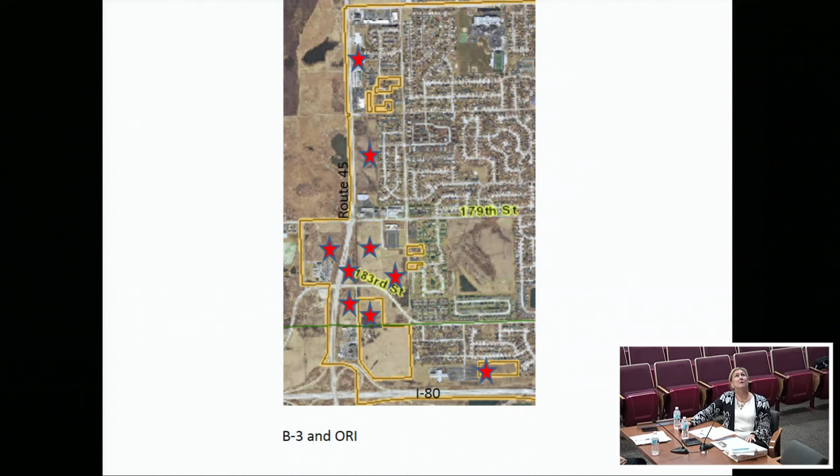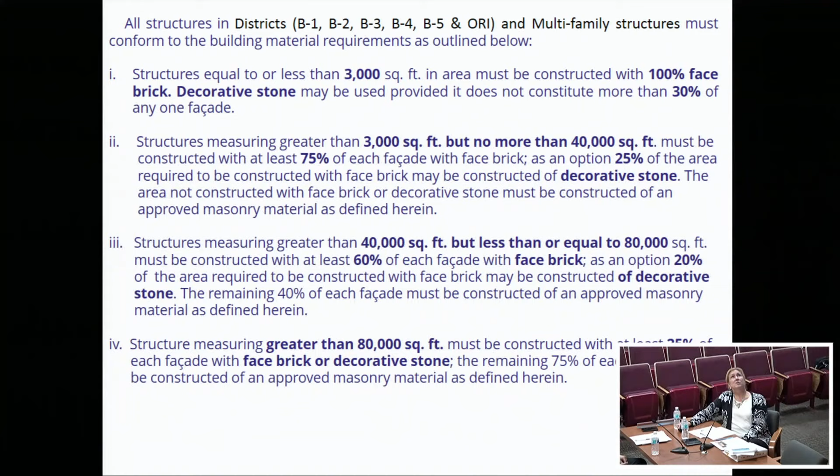The biggie is the mental health center, that's an ORI. So this is just the language—in your staff report you'll see the final ordinance I provided, if you want to take a look at that, but this is what we'll be adopting when we go forward to the village board.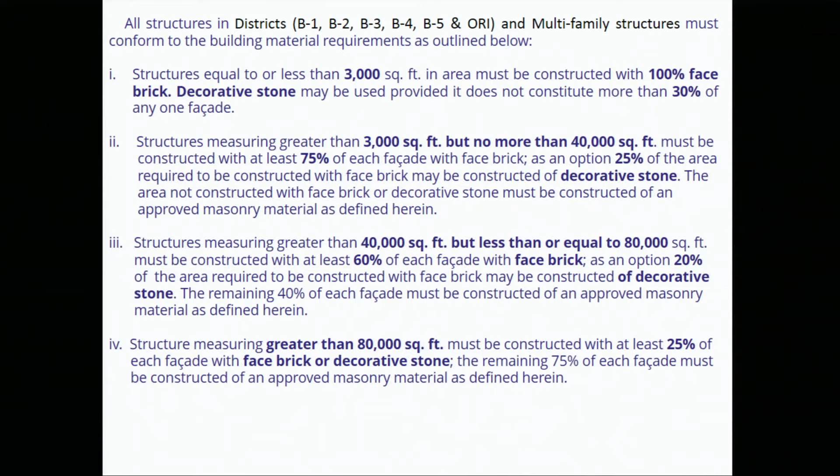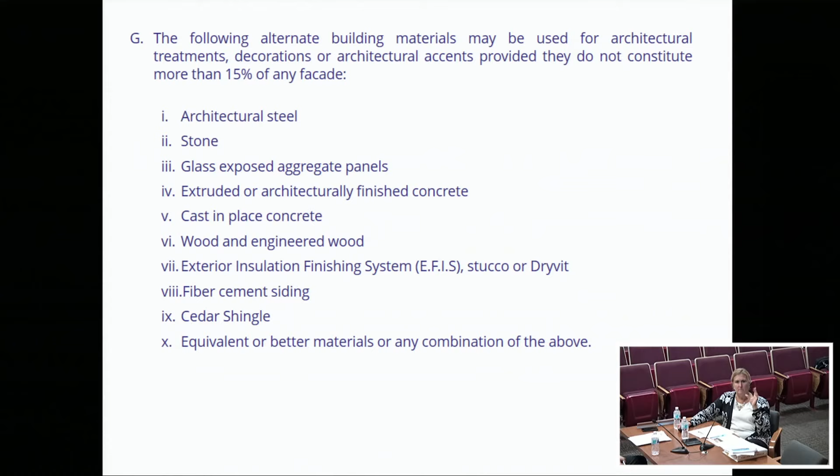The only other aspect that really wasn't defined in the current code was that you could take 15% of any facade and do some architectural treatments, and that's what this is outlining. We never said what you could do, so this gives you the materials you could use to help jazz up the facade a little bit. It also specifically identifies prohibited materials, which we had done in the building code, but this makes it clear what is not allowed. It also provides for any addition to existing commercial buildings.

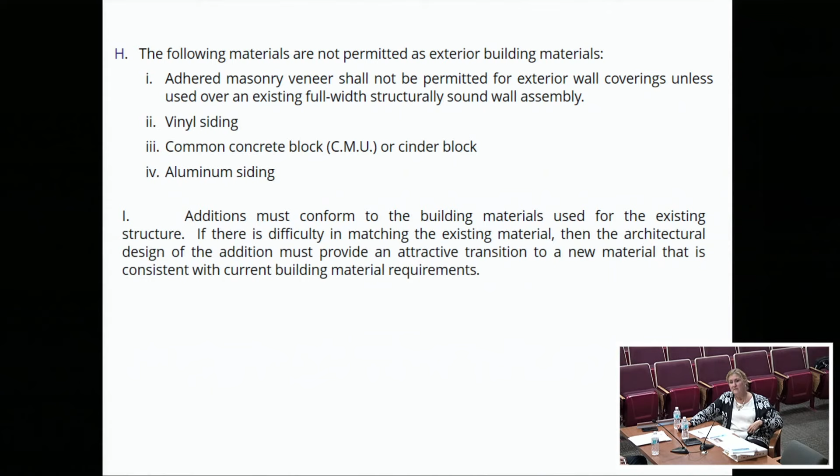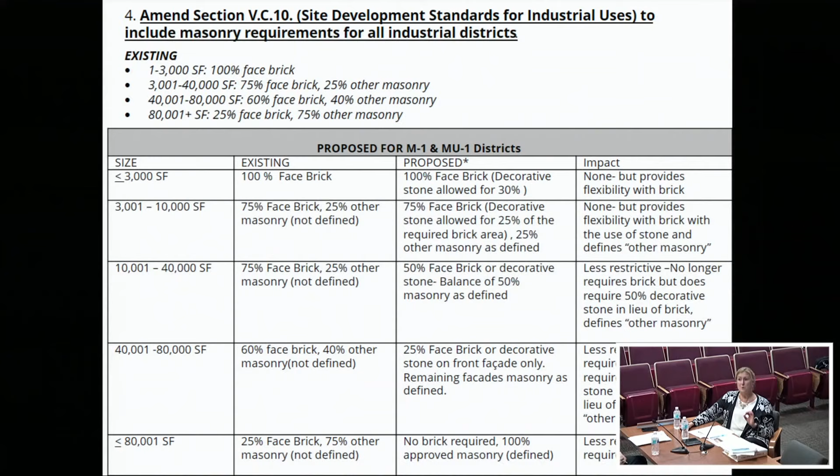So the last section we're touching is for industrial uses. This is probably where you're going to see most of the changes. In this table, up at the top is what exists right now.

The one change is I added another threshold, where before we just broke at 3,000, 40,000, 80,000 and above, I added another threshold over 10,000. That was really what we found in our research of where to start to break for cost of product.

For the brick, up to 3,000, things are remaining the same. The only thing we're doing for industrial buildings is giving them flexibility to do some decorative stones. From 3 to 10, we're keeping the 75% requirement, so not much change there, but again providing the option of decorative stone.

Now when we go above 10,000, on these larger buildings for industrial uses, we want to provide a little less restrictiveness on the brick requirement. Whereas before we had a 75% face brick requirement, we're reducing that down to 50, with the same option of allowing some decorative stone.

From 40 to 80, the way it exists right now is 60% face brick. That's a pretty large building. We're reducing that down to only 25% face brick, and it can be face brick or decorative stone, so it is much less restrictive.

And as I mentioned before, having a definition for masonry on all of this provides for more flexibility and opportunity for the designers of these buildings.

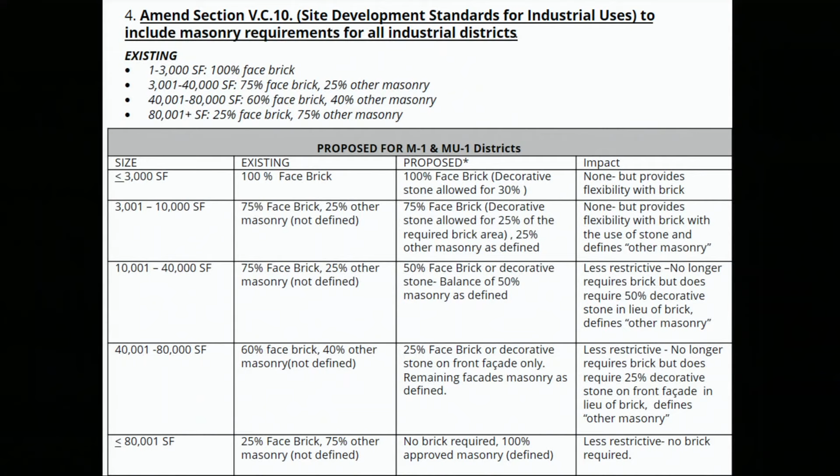And the last section, these are those large buildings over 80,000 square feet. We currently are requiring 25% brick. In the new proposal, there'll be no brick required. It still is masonry, still 100% masonry under our definition, but no face brick on those larger buildings.

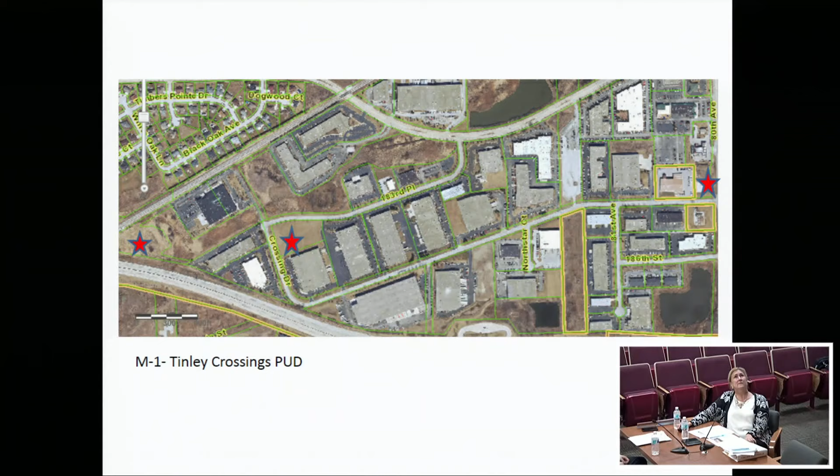Just to give you an idea where you'll start to see this happening, we don't have as many opportunities in our industrial districts as we do with commercial, but we do have some. This is out in Tinley Crossings, it's a PUD, Devan Drive. There might be a lot of new development out there, there's some other building stock out there.

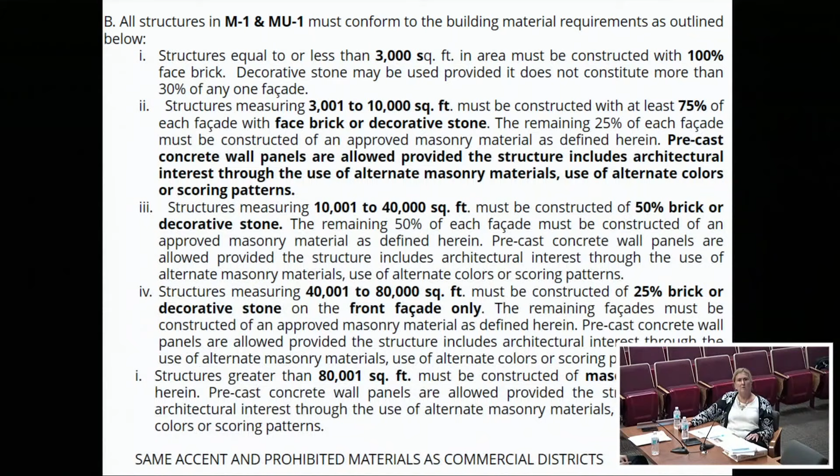So the importance, and the whole reason we're doing this, is we're trying to stay competitive with our neighbors, and we're trying to encourage more industrial development in our community, especially on the Cook County side. So that concludes my presentation.

I have motions written in here. As I was looking at this today, I was trying to be a little more efficient. If you want to read your motions off the slide, you're welcome to. There's nothing wrong with the ones that are in here. Rather than go into all the details of what these changes are, I'm saying approve them unless you have some comments you want changed, as written in the statute.